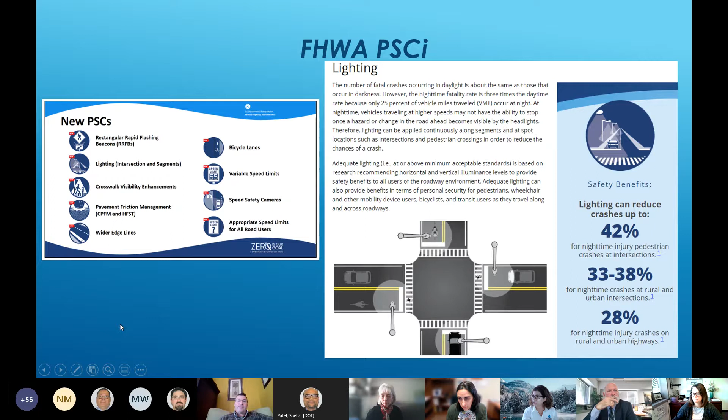New to be released in early '22, to assist practitioners with determining the most appropriate proven safety countermeasure for their location of interest, the webpage will now include a filter tool that allows users to obtain a tailored list of potential proven safety countermeasures. Users answer questions regarding area types, functional classification, traffic volumes, issues identified, targeted crash types, and other information to receive a list of the proven safety countermeasures meeting their criteria. The search function is intended to better serve practitioners, including those with limited safety background, when identifying and considering treatments and strategies that can improve safety as part of their program or project.

Both FHWA and NJDOT strongly encourage all agencies to consider widespread implementation of the proven safety countermeasures to accelerate the achievement of local, state, and national safety goals. Reaching our goal of zero deaths and serious injuries requires all of us to take ownership in safety. Together, we consider the safety needs at every stage of the project implementation process, the safety impact of every investment decision, and the appropriate safety countermeasures for every federal aid project.

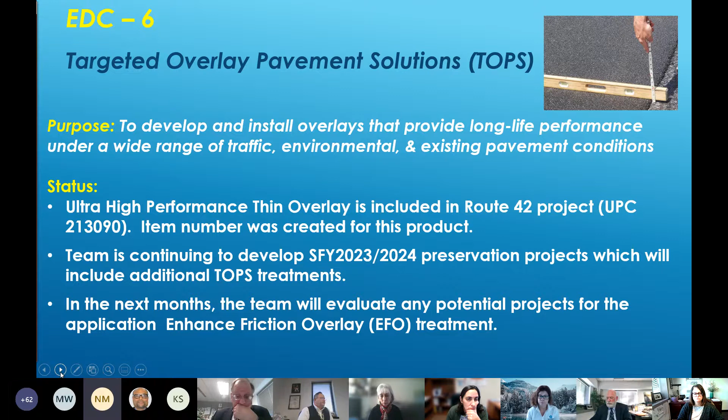Since last quarter, we have included ultra-high performance thin overlay in a project on Route 42. The team is continuing to develop fiscal year 23 and 24 preservation projects, which will include additional TOPS treatments. Next quarter, we're going to evaluate any potential project for the enhanced friction overlay, or EFO, treatment. Next slide, Amanda.

The last one is ultra high performance concrete, or UHPC, a fiber reinforced composite material with mechanical and durability properties that far exceed those of conventional concrete materials. Since the last quarterly, NJDOT has hosted the FHWA EDC6 UHPC workshop on October 20th and 21st, with 191 attendees including New Jersey contractors, designers, suppliers, and state and county engineers.

The workshop provided participants with a great understanding of what UHPC is and a suite of solutions that include using UHPC for bridge deck overlays, link slabs, and steel girder end repairs. It also gave participants information on where to obtain guidance necessary to implement different types of UHPC preservation and repair strategies, and allowed them to discuss their UHPC implementation strategy, construction specs, and design details with FHWA EDC6 UHPC team members.

In addition, NJDOT provided support to researchers at Rutgers for UHPC testing in the BEAST lab. Currently, we are identifying testing locations for performance testing on the UHPC overlay pilot projects. The highway occupancy permits were submitted last week in hopes of initiating the testing by the middle of December.

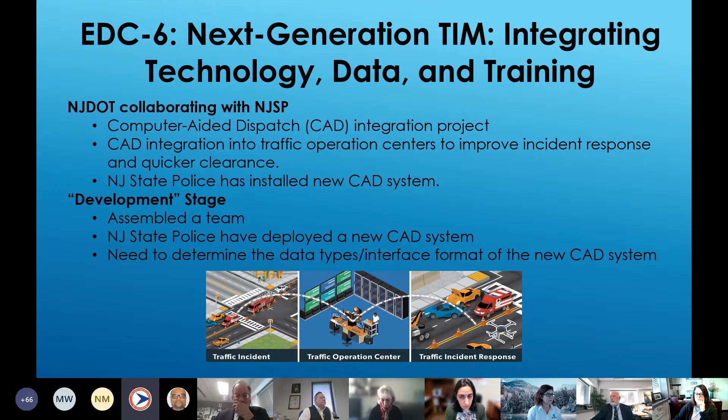I will provide an update for crowdsourcing for advancing operations. Here in the state, we are learning the different ways to use crowdsourced data. It provides a different way to monitor real-time traffic conditions, and it may also increase the geographic coverage area beyond fixed location roadway sensors.

NJDOT will collaborate with Waycare, an information service provider that collects crowdsourced data from weather data, mobile phone apps, and connected vehicles. The pilot project is currently at the development stage, and federal authorization of funds has been approved.

NJDOT is currently coordinating with the state OIT to make sure the new software application with the Waycare vendor is consistent and in compliance with the state OIT enterprise system, data architecture, and cybersecurity requirements. It's my understanding the NJDOT Mobility Operations Office will meet again with the state OIT this Friday to discuss some of the IT requirements. This concludes the status update for mobility and operations.

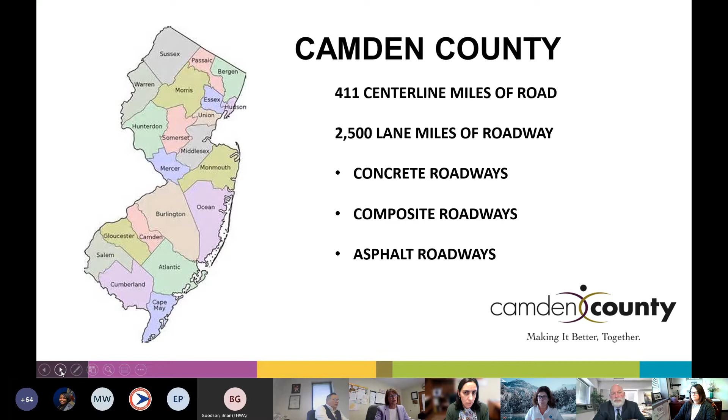Everything kind of came out from the top left-hand side of the map, which is where Camden City is. The growth went along the Delaware River towards Burlington County and then south along the Delaware. Those are our oldest cities, and then everything went down the White Horse Pike.

So those roads that were put in before 1950 are basically concrete. And what I like to tell people is my great-grandfather probably dredged the Delaware and created all that rock that is in these pieces of concrete that I'm working with.

After 1950, when we started driving cars and everything got widened, they left the concrete road in, and sometimes put in concrete curb and gutter, and sometimes asphalt. Then nobody liked the concrete, so I have quite a few asphalt overlay roads.

Down south, if you look at this map where it gets narrow, where you see the red line close to the bottom, those are our southernmost counties, and some of them are in the Pinelands. A lot of those roads are chip and seal with just 2 inches of asphalt on top, which is not doing very well at all.

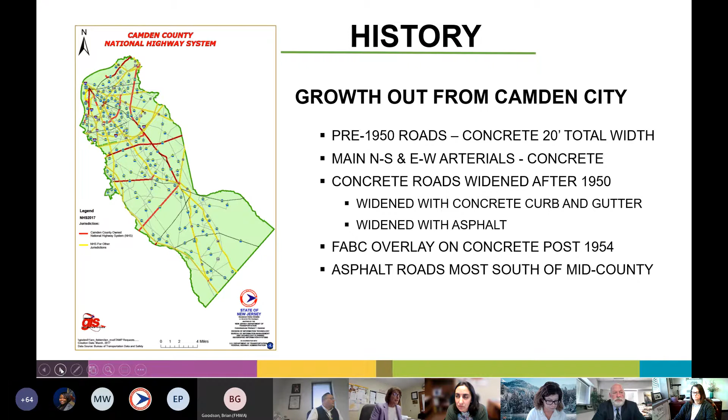So here's a typical concrete road in Camden County. If you look in the center of that picture, you see the manhole, and the older slabs are kind of lighter in color. They're 10 foot wide, and each slab is about 20 to 30 feet long.

Then the road was expanded, and in this part of Haddonfield, the expansion is concrete slab shoulders. I know this picture's a little fuzzy, but the curb is not in good shape.

What's really interesting is some of our concept developments that Collingswood has done—they have pictures from before 1950 when the sidewalks were 12 feet wide. So it used to be a walkable community, and when cars came in, they took those 12-foot sidewalks out and put in these shoulders.

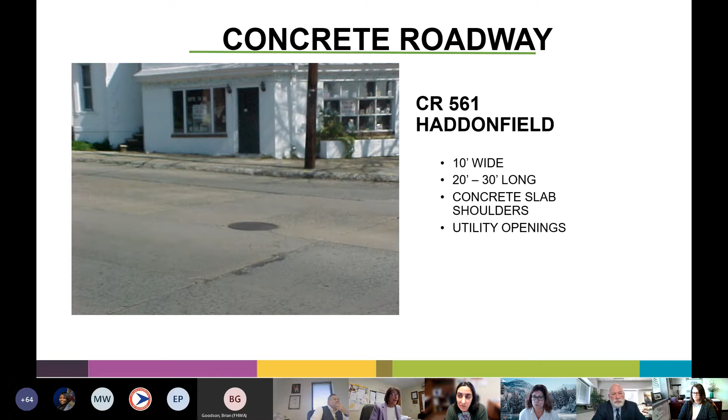So what are we doing with these concrete roadways? I just want to talk to you a little bit before I go into BRIC and SMA. In some places, we are just replacing with full concrete slab replacement.

It's very expensive. If you guys come off of 295, this is 561, which is called Haddonfield Berlin Road. At the 295 exit, we did full slab replacement. The rest of the road, we did joint repairs 4.5 feet wide with no diamond grinding. This is one of the alternatives that competes with our TOPS program.

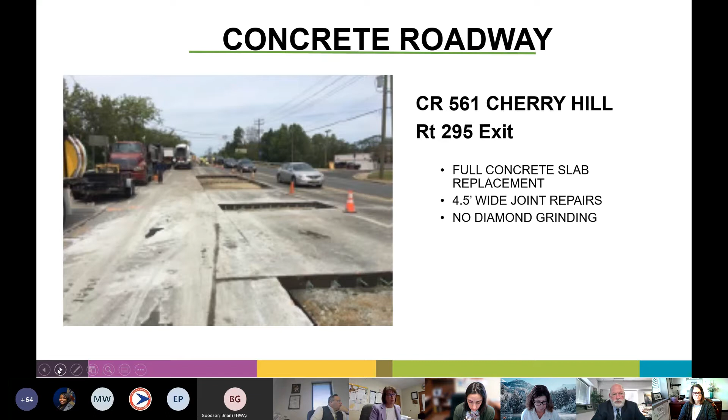So here's a typical composite roadway. As you can see, the regular asphalt that went down, probably it was I-4 a long time ago. We had the current asphalt. It fails at the transverse joint, it fails at the longitudinal joint, and even if it's sawed and sealed, it fails.

On this job in particular, what we did was cut 4.5 foot wide transverse joint repairs, taking out that terrible joint across the picture. Then we put back regular 9.5 M64 and sawed and sealed it. It doesn't hold up well—you've got failures adjacent to the saw and seal, and in the future those transverse joints will fail. I'm sure all of you here know that, because that's why you got rid of saw and seal.

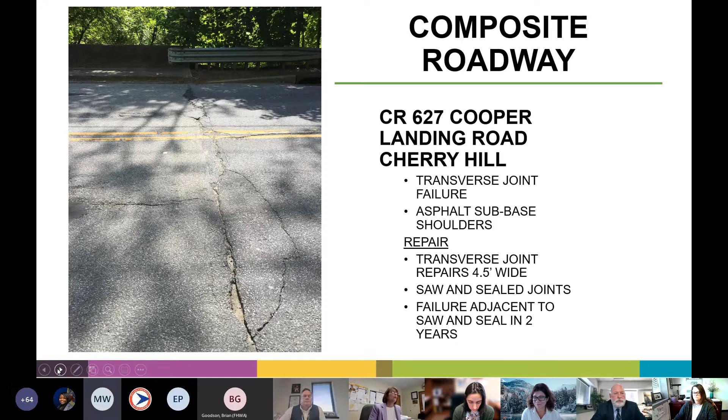So this is the first project I want to talk to you about, Westfield Avenue Phase 1. Westfield was bid in 2017 in Pennsauken, which is just to the northeast of Camden City. Again, most of the major roads are concrete. This was a half-a-mile project, and it cost $1.1 million for half a mile.

Why is that? Because the drainage in this roadway was completely failing. We were having flooding in front of business owners—the orthodontist building flooded, the real estate office flooded. Basically what we had was water utilities and sewer utilities going through the old storm pipes. This is something that happens when you're dealing with something that's 100 years old.

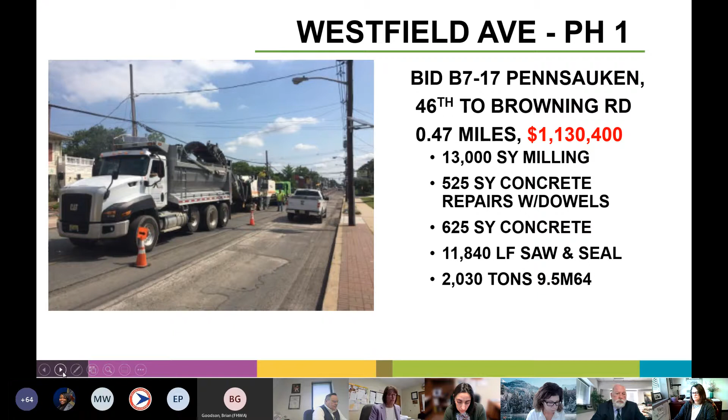So we're going along milling, and it's summertime. And what do I get? I get a call: we don't have asphalt under this road, we don't have concrete under this shoulder, we've got railroad ballast. Like, oh shit, okay, what am I going to do?

Now, the other thing I put on here is, in this job, I have really good curb. It's not crumbling and I have a lot of reveal. So that's a real positive, unlike that curb we saw in Haddonfield where it's just totally disintegrating. Next slide.

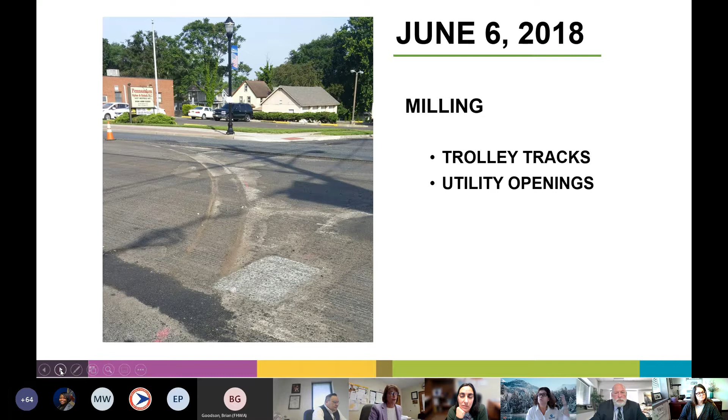The other thing we had on Westfield is old trolley tracks. That curve you see going across this picture — those are train trolley tracks, from when we used to have a trolley with an electric line that went up and down Westfield, in and out of the city of Camden. The metal was never removed. So this is where, luckily, I had a really good contractor who said, hey, even if you pave over this, it's going to fail. Next slide.

This is a week, two weeks later — we're putting down that binder-rich intermediate course. Again, I had a really good contractor. They were able to get the plant shut down. They had the equipment, and there we were. There's a picture of putting the overlay on top of here. So the public had no idea that we'd changed the scope. I also had a very good construction manager and inspector in the field, so we were able to do this in two weeks without delay, because this road has a lot of businesses and they'd all been notified of the detours and the work coming. Next slide.

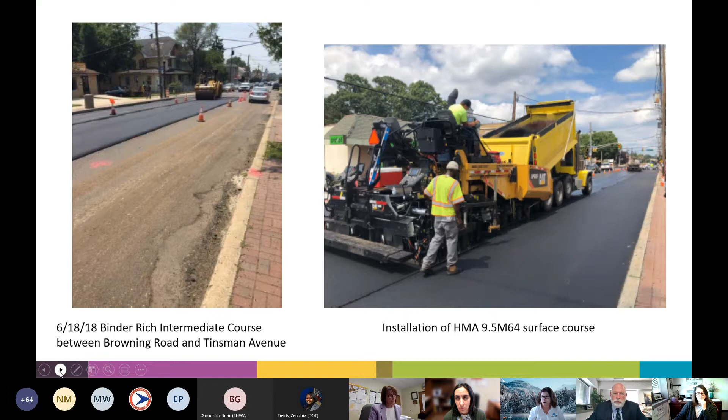So that was a success. The next project was Westfield Avenue Phase 2. Here, I basically had it designed with binder-rich intermediate course in mind. This was the job we designed and put in for NJIB funding. Some of you on this call probably came to that gold shovel opening, where we had tractor trailers going by us the whole time.

I see a question — oh yes, we definitely used an approved mix design. We tested it, not a problem.

So we have two sections in this 1.4 miles of Westfield Avenue. Basically, we have a downtown area closer to the first phase, and then a very industrial area where Pennsauken is close to Route 130, Route 90, and the Betsy Ross Bridge, heading into Philadelphia. So the design, even before we had NJIB money, was to do the binder-rich intermediate course in the commercial area and the stone matrix asphalt with overlay in the industrial area. You can see the prices there — basically $750,000 was just for that asphalt out of the $2 million.

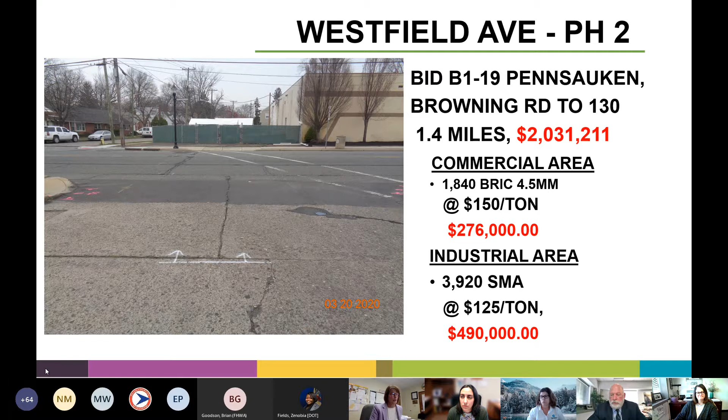To your point, when we wrote this spec, we basically used the DOT spec. The only thing I changed was to make it 4.5 mm for the BRIC, so it had greater flexibility. I think that was Robert who helped us make sure we had that for the 1 inch, so it had greater flexibility. I think even when we did that change order, we did the same thing — we called Robert Blake. Next slide.

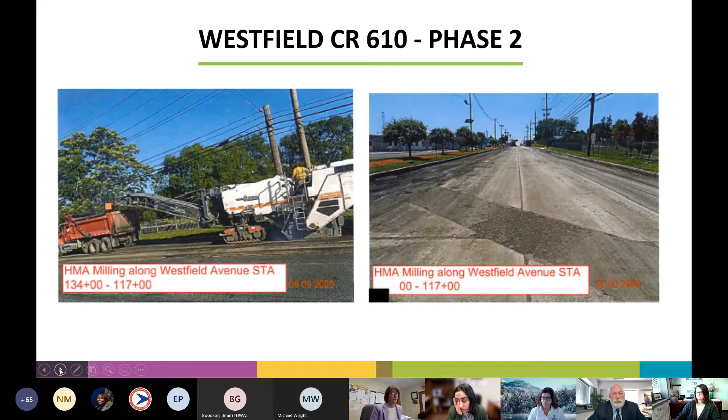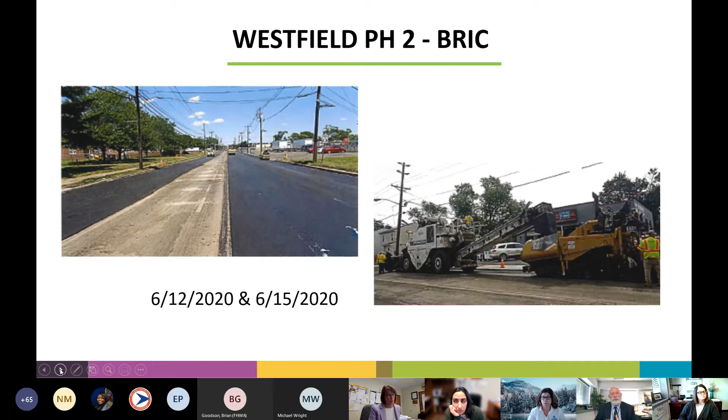So here we are putting down the BRIC. All my specs require a transfer machine, and the contractors I use have all gotten used to this. When we did the binder-rich intermediate course, this contractor was South State, so they have total knowledge of using this material since they work for DOT.

So the stone matrix asphalt, we had to do at night. You have so many trucks in this industrial area, there's no way you can stop business to pave, so it was all night work. And even after they did the stone matrix, we had to do some leveling courses just before we put the surface paving on.

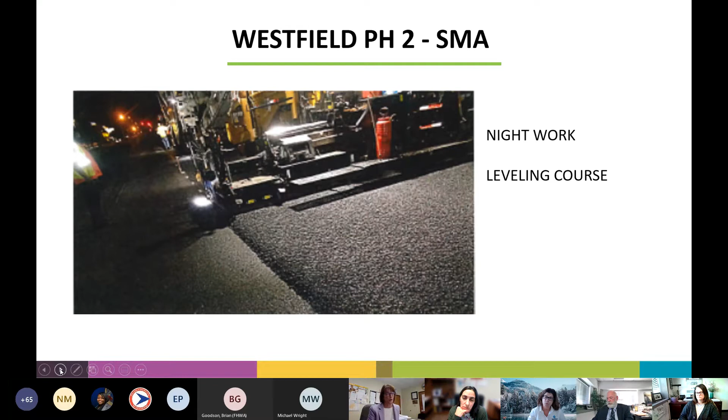So I think one of the things I've learned, why do I mandate a transfer machine? Because when we switched to 9.5 M64, around 2012, I was getting asphalt that was separating. The first road I did with the new material was Nicholson Road, and it was terrible. Even though everybody met the requirements of it not being in the truck too long, around the radii it separated, and it was a bear to try to get the contractor to come back and fix it.

Because I don't like infrared. I think infrared is a really bad way to make repairs, so I make them mill it and redo it. So I've found with my larger jobs, if I use a transfer machine, it gets remixed, and then I make sure my inspectors are sending trucks back if they sit too long.

As far as this set of plans for Westfield Avenue Phase 2, one of the things we really went over with our designer, Tane at the time - they're not working in South Jersey, I know they're working in North Jersey - was to have a good set of plans that really made it clear where the road shoulders changed and where you were putting down the binder rich and then the surface course. That good set of plans, and of course a good spec, a DOT spec, really is crucial to getting a good project.

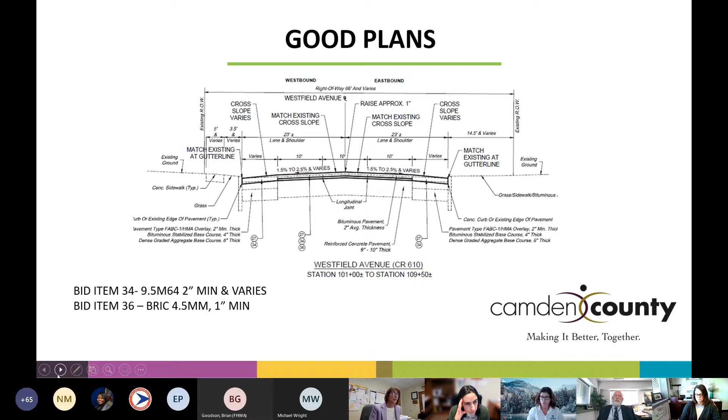So this again just goes - I use the NJDOT standard. As a county engineer, I really appreciate all the work that the material department does because I can rely on it; I don't have to learn it. The other thing that I think is really important is that all my submittals are reviewed by my designer, and I don't think you can do that at DOT. I think your designer, once a project gets authorized, has no more work on your project. So I can do it a little bit differently if it's not federally funded.

The other thing I do is I always have an inspector at the plant. If it's regular asphalt, I make my inspector check the RAP percentage. My inspectors in the field have to be trained - when I ask for proposals from consultants, they have to document that the inspector has been trained. Going back to get these pictures, I've got photographs from my inspectors of the temperature on the tack coat, the readings on the tack coat, the street sweeper cleaning the road. So all those things become almost as important as the piece of paper that you bid.

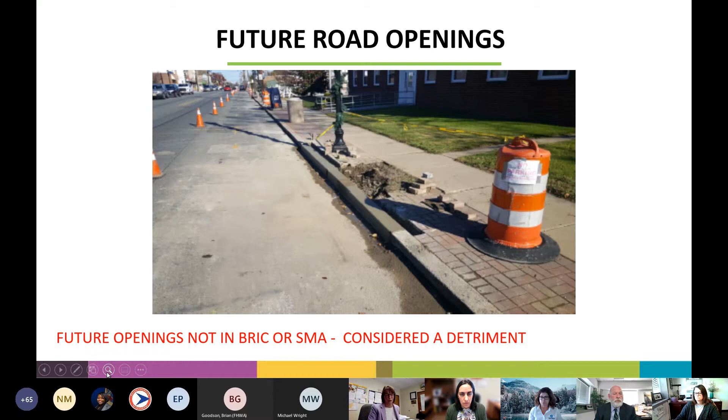So far we've been getting some pushback, but it's helpful. But in the future, if a water main breaks or you've got a gas leak, they're not going to have binder rich intermediate course or stone matrix - it's just going to be regular asphalt.

So this is what I see as the benefits, and maybe I'm preaching to the choir here, but I know that Amanda went and tried to find out the durability of binder rich. It's 15 plus years for a standard overlay. Sometimes it gets 10 years, sometimes less, especially when I'm doing composite roads.

The other benefit that I really see is the rideability. Because Westfield Avenue and anything else we do in the future with binder rich or stone matrix doesn't have to have that saw and seal. The public doesn't know what we're doing, they don't care what we're doing, but if they don't have that thump, thump, thump in front of their house, and then I don't get the call that my house is going to fall apart because of the road, I think that's a super benefit. I just think it's wonderful.

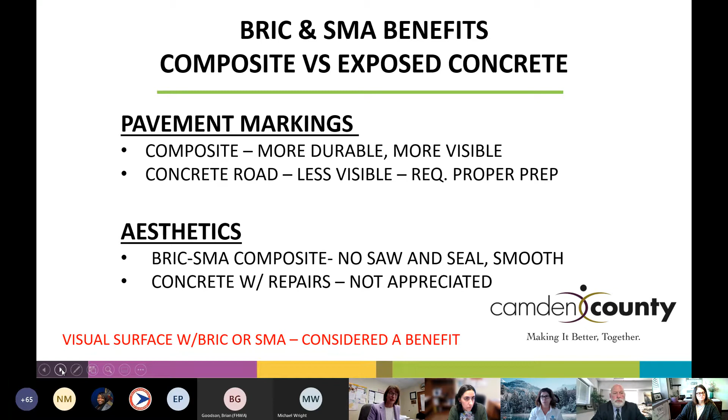The other thing that I have done, I didn't show you here, but comparing a composite road versus taking out a concrete road and putting in an asphalt road in Camden County is almost a no-brainer. We have concrete slabs that are 9 inches thick. If you have to take out a concrete slab and put in the standard county DOT spec, you're removing 5 inches of material, and that material has a high chance of being contaminated. Then you have to have a material handling plan, you have to have an LSRP, you have trucking costs, and God knows if it's really contaminated, you've got a lot of work ahead of you.

The other thing in Camden County anyway is we're in the alluvial plain. We have clay soils, fine silty soils, and a high water table. So if you take out a slab and put in an asphalt road, and you're anywhere near a low point in the road, that sub base you put in is going to pump. 6 inches of DGA is not going to do it. You're going to end up doing a change order and putting in 12 inches or 18 inches of DGA. And the other trick here is you don't even have to be in a low point. You could have perched water on top of a clay lens and it's not going away. That perched water is going to keep coming towards you.

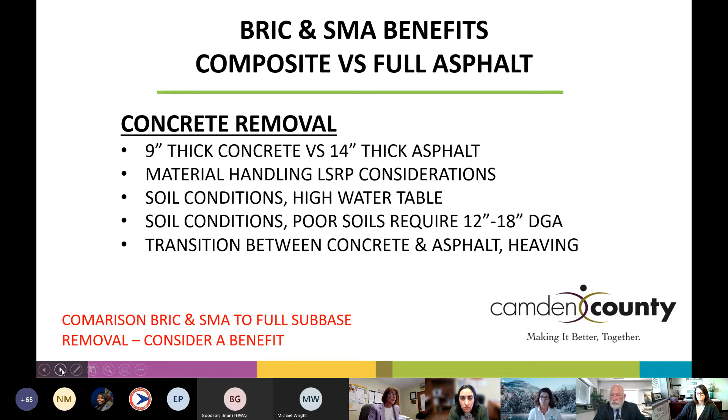I have been very lucky to have advocates on my side who are not engineers, who I explain this to, and then they explain it in non-engineering terms. You've got that 15 seconds of elevator speech, and if you go beyond 15 seconds, that's it, you're done. They don't want to know. But if you can tell them, hey, you're going to spend $500,000 more, but the road's going to last longer and you're not going to have failure, that's almost all you need to say.

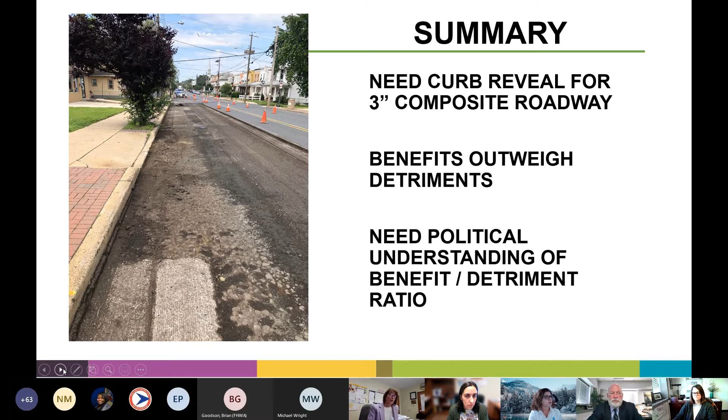So my next slide is just showing you what I hope to do in the near future. This is Kings Highway, and again, if something's called Kings Highway, that means it was started when there was a king in the United States, so it's pretty old. So what you see here is concrete slabs in the middle and an asphalt shoulder on one side, concrete slab on the other. Somewhere along the line, the center line of this road changed. This, we hope, will be our next stone matrix or binder rich intermediate course, and we're hoping to fund this using NJIB funds.

Next slide. I know we answered some questions, but I'd be glad to take any.

Kevin, there was one more from Bob Signora. Can you institute a utility opening moratorium by any chance, 5 years or 7 years, where they can't cut into your roadway? We had a 5-year moratorium and we changed it to a 7-year moratorium. So we are enforcing the 7-year moratorium. Now, that doesn't mean you can't open the road. What that means is you can open the road, but you must pave curb to curb and 100 feet in either direction from your opening.

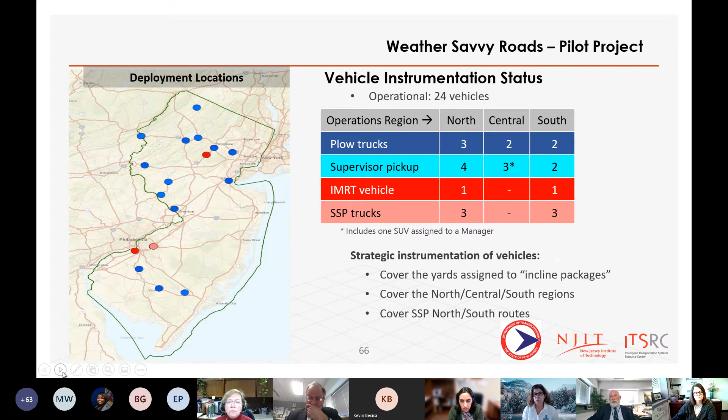You can see that we have a mix of plow trucks, supervisor pickups, IMRT vehicle. IMRT lingo is Incident Management Response Team. SSP is Safety Service Patrol, and they have them in different areas. As you can see from the map, the colors show we have them in a number of places. Some of the vehicles were selected because of the incline packages, and incline is really referring to Route 78 in Jugtown Mountain, Route 280, where there's a steep incline. So that's where these are.

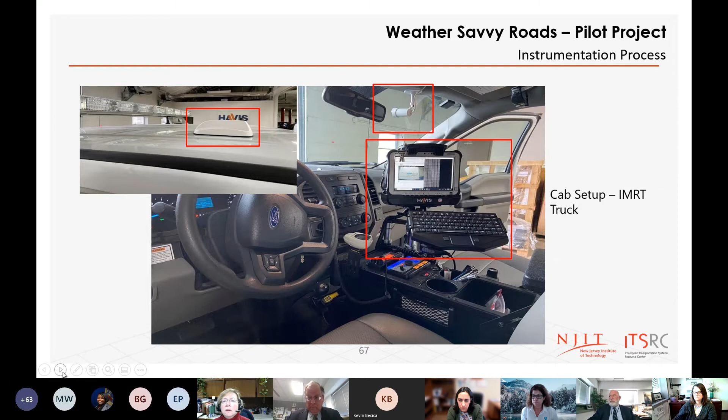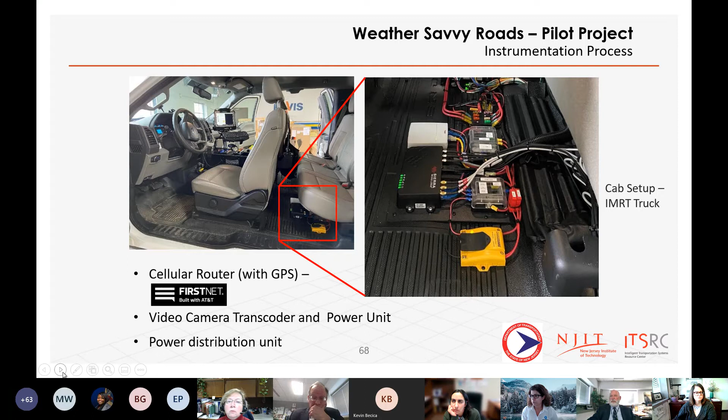This is basically the same vehicle, but now you can see where we've put the other equipment, the cellular router, and all the other wiring that goes along with it. This happens to be an area we're looking at to try and figure out how to lessen the footprint, because as you can see on the picture on the left, it's currently sitting under the back row. Although that's not too bad for an SSP vehicle or an IMRT vehicle, the folks using the vehicle get in and out a lot, in bad weather and whatnot. So we're trying to look at ways to reduce the footprint so we can better protect it with respect to dirt, dust, liquids, things like that.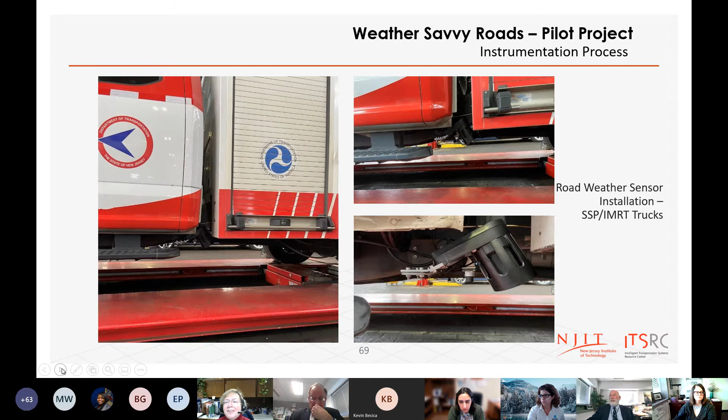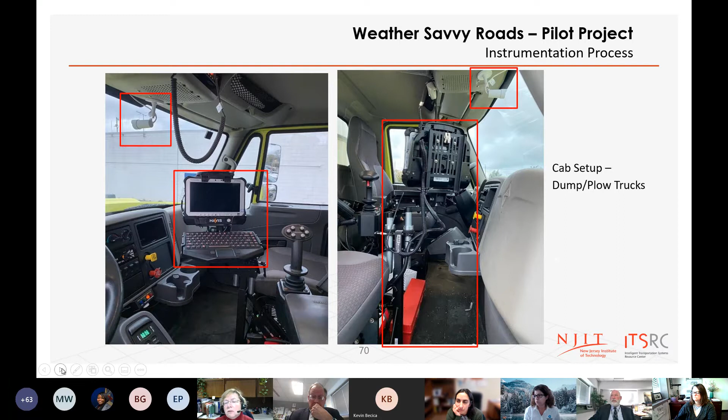This is inside the plow truck, basically the same setup as what you saw on the IMRT pickup truck. The plow is basically the same thing, you've got the camera, the tablet, just two different views in the cab. We've found that the different manufacturers make plow trucks make it a little more interesting to do some of the installs in there, so that was something we had fun with as we went on.

This is the plow truck on the outside. The left photo has the red box around the MRWIS sensor that you saw underneath the SSP vehicle. This is in the front of the plow truck due to the way the configuration of the vehicle is.

This is a better spot for us to squeeze it in. The picture on the right is the ambient sensor we installed. When that comes from the manufacturer, it comes as one unit, and we separate it: the white stick goes away from the other part, because we want the MRWIS part closer to the road, and the ambient temperature stick a little higher and away from other things. We place this on most vehicles behind the cab itself to give it a little protection, but keep it nearby.

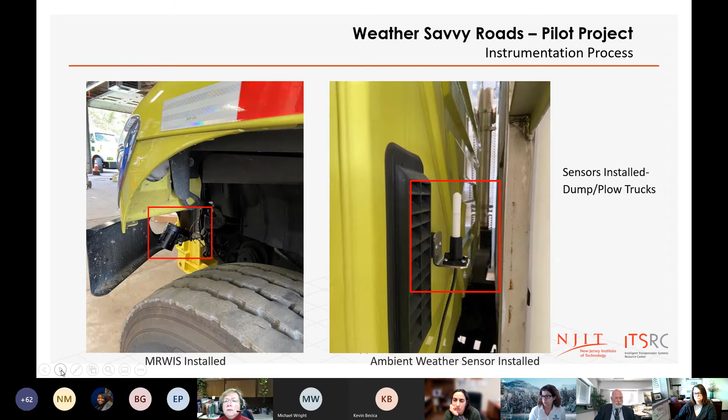Okay, this is our web interface. The 139 users may not be an accurate number, it may be a bit higher now—I've asked for logins for a couple more people. The upper left is the actual entry page into the website. We have a defined group of users, and they set up their own passwords. The bottom left is where you can change settings a little, like your password and things along that line.

The bottom right is a map, and on the left side of that it shows the different vehicles out there and which ones are operational. Green is engaged and moving with the engine on, and red is stopped—just like you'd expect with a traffic light. We try to make a lot of this intuitive from your general knowledge, not something where you have to learn a whole new language or code.

In the center of that bottom right photo, you have a map showing where the vehicle has been. I refer to it as chicken tracks—you see where the vehicle has been, and it's color coded by the temperature of the road and everything. On the right side, you see the image the driver sees, and above it, information from the weather sensors: air temperature, road temp, humidity, dew point, all that stuff. Below the image, you see other information such as water, ice, snow. There will be dials all the way across if we're in a major storm, showing water, snow and ice, all those wonderful things—shown at the bottom there.

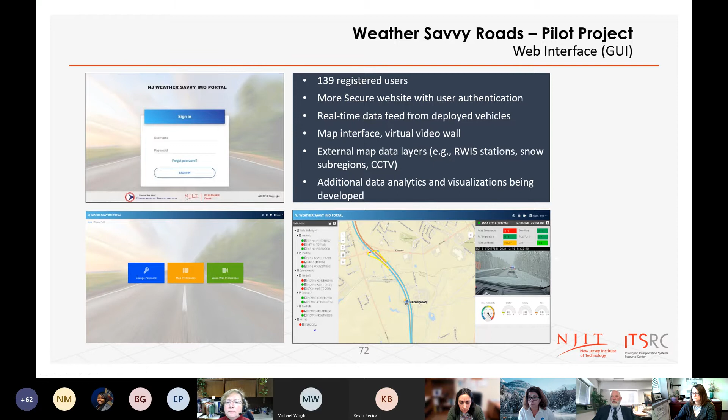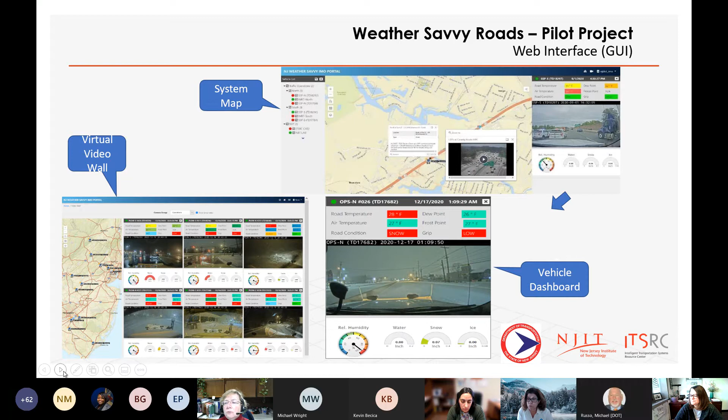This is more of the same, just a little bigger. The video wall was added partway through last year, because people wanted to see more than one vehicle at a time—they wanted to see what neighboring crews had. So that's what we did with that. On this image you have six vehicles, and they all show what the driver sees. The center image, labeled vehicle dashboard, is just blown up separately from the image above. It basically shows what the driver sees, and it really gives a different perspective for snows and finding out information.

Again, this is basically the same image from the bottom left on the previous slide, just a little bigger so you can see and get a better feel for everything. This is all the same storm—one of our early storms last year—and we were quite happy with how Weather Savvy performed during that storm. Just really nice.

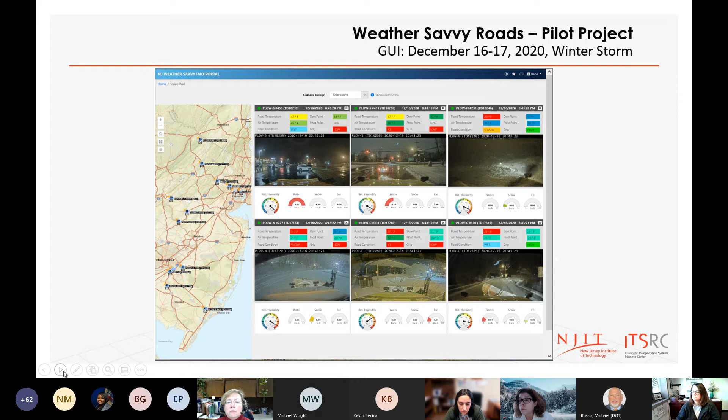This is our Firstnet information here. It's about how good our signal strength is, and when you look at it, it's not too bad. This was from December of last year through February of this year, and it came out with a really good number for us: 98% excellent or good signal strength. That was a nice thing to see. The map in the middle shows a couple of points where we have a bit of an issue, but it's good to know where your positives are and where you need to watch out for some things.

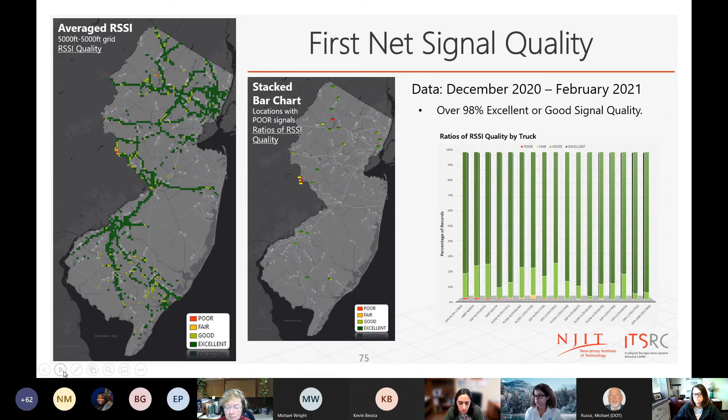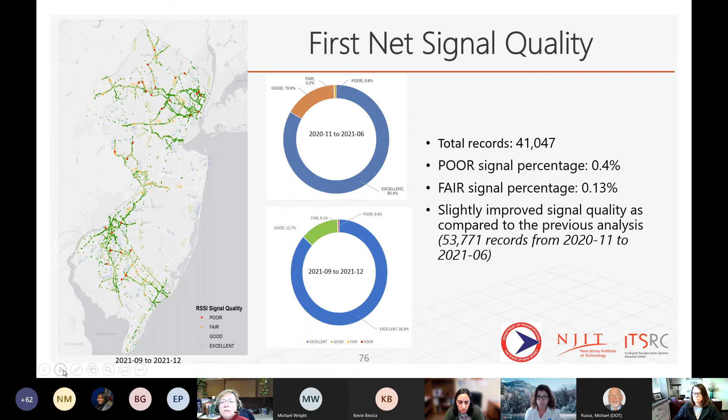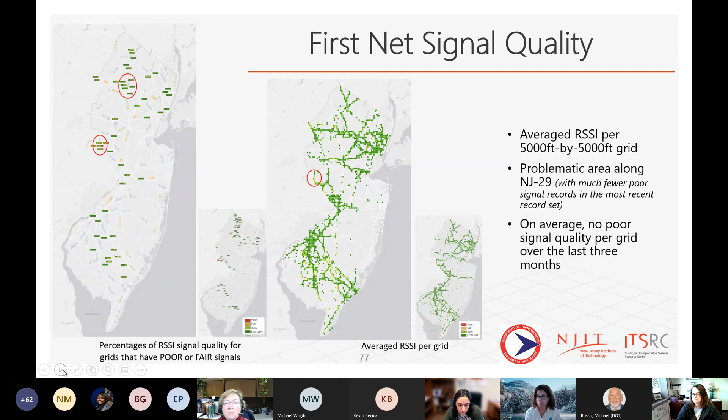So next. I'm killing everybody with these slides, I know, sorry. These are fun for us, but this does show you the two spots that we have some issues with. One is along Route 29 up in Hunterdon County. A little bit might be geographics and everything.

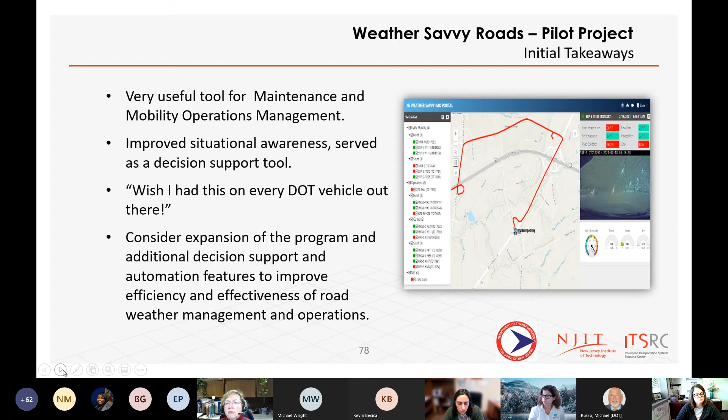So one of the things we considered, partway through, was what are we going to do for more? What can we do to improve this? So we've done some things in the course of the year, small additions, small changes. Go to the next slide.

Some of the stuff we have learned and modified as we went along - one thing I hadn't mentioned before, but you can read at the bottom, is NJIT has been helping us with this. NJIT is the ITS Resource Center, and through their work and looking at the data coming back to us, they discovered something that was an issue. The data didn't make sense - it just wasn't right.

So they ended up having conversations with the vendor, the Vaisala vendor, and said, this is interesting, can you swap them out and give us those sensors back? So we swapped them out and gave them the sensors, and that's where they found an issue with their manufacturing that didn't show up anywhere else. But because of the data we had going back, and NJIT was actually examining the data, as opposed to a lot of other places - some states and other countries were using it and accepting the data coming back - they ended up benefiting from our thoroughness here.

The next thing was the tablet. We had installed tablets in all of our original vehicles, and while I was in a garage waiting for a sensor to be installed on another vehicle, I got a phone call saying there was a tablet stolen from one of our trucks. I was like, what? How did this happen? Because they are locked in, but whoever took it broke the frame of the mounting unit to get to the tablet.

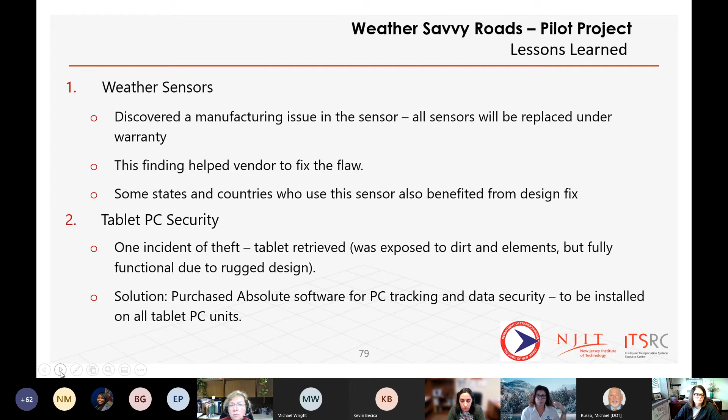As a result, we've now put tracking onto the tablets we're installing, to allow us to wipe the unit clean if we need to at a later date. This isn't going through the Garden State Network, it's going through NJIT, but we still didn't want - some people may be using it for their work activities - we didn't want any of that information compromised in any way. So we have that ability now. So if you go next.

Dashboard cameras. The dashboard camera is the one in the upper left, and sometimes we ended up seeing the image on the right. While that's a very nice picture of the dashboard inside the vehicle, it didn't quite have the same effect as showing what the road conditions were. And if you put the plow on the end of that truck, you really would just see the backside of the plow.

So we've done a couple of things with this. One is we've looked at putting something into the tablet that will allow the driver to click on and see what the image really is, because those bullet type cameras can get knocked around, can get accidentally hit, or some people like to adjust it themselves, and this way they can see where it should be when they're all said and done. Another thing is a different type of camera, which you'll see on the next page.

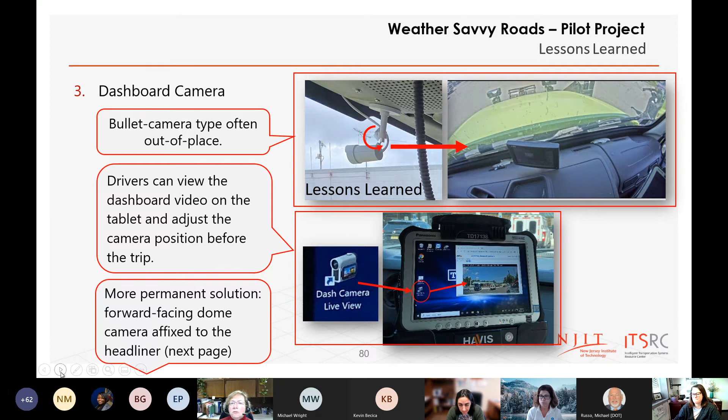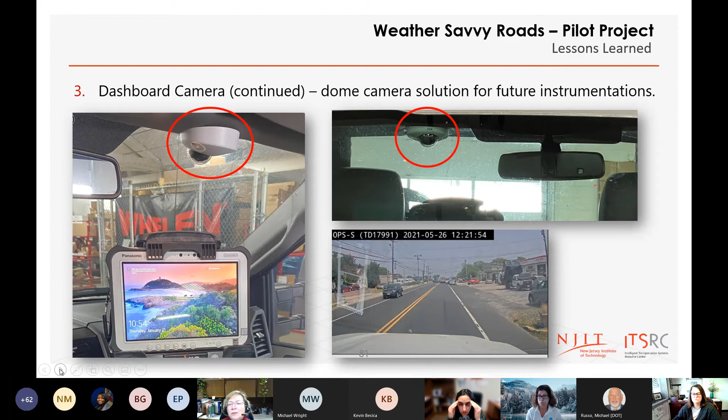This is a dome camera, and the dome camera is one that doesn't get hit. Once it's fixed, it's fixed. So that should make it easy — you don't have to worry about people bumping into it, somebody knocking it with papers going in front of them, or just moving it. This is something we're putting in and testing out this year. One of the interesting things is that this dome camera actually gives a better quality image for less money. So it's kind of an interesting little thing, but we're still looking at it for other aspects of it.

Okay, and these are some of the things that we were looking at. The cost per vehicle is about 15 grand. That is basically soup to nuts.

One of the things we've had issues with is not just the EAI vendor, but the FirstNet vendor. Our two vendors — that coordination is a challenge. We're dealing with different vehicles from different areas of the state, finding a spot to use the garages for the installation of the weather sensor. But EAI is a vendor where we have to take the vehicle down a day before, drop it off, go back two days later to pick it up, because they need a whole day for installation.

For some reason, they prioritize state police over us. I just don't get this. But the state police are also doing the same type of thing — they have their own similar equipment in their vehicles, and they end up with priority. So we've had some scheduling challenges in the past that we've tried to manage, so we get a couple days in a row, so that if say North has to drop a truck off and they have two trucks, they can drop one off, and as they're picking one up, they can drop the other one off. It's a lot of logistics going on with a lot of different people and a lot of different priorities.

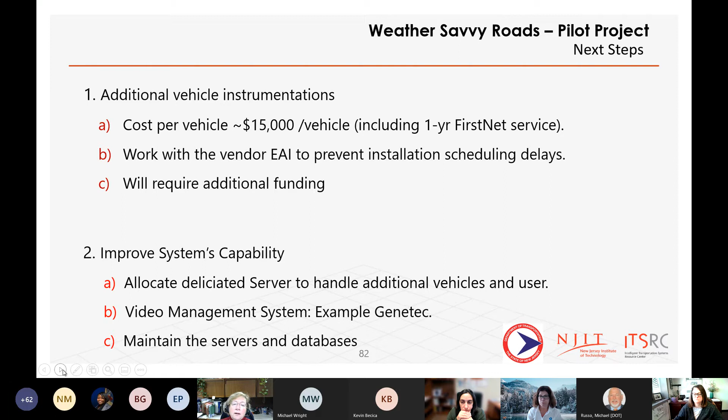It's sitting, as you'd think, underneath the vehicle or in front of the plow, under the front bumper. It's going to get a lot of snow, a lot of dirt, a lot of calcium, a lot of stuff. After a snowstorm, what do people do? They run to the car wash and get their car washed.

And that's what this needs. It needs to get a garden hose basically up underneath to clear the lens, because it's optics being sent out to the road and back, and it needs to be cleaned. So we've said, look, if you need to take it through a car wash or a truck wash, fine, go right ahead, do that. But don't get your undercarriage that special treatment. Don't do that, because that's going to leave a film on your lens. That's going to be a problem.

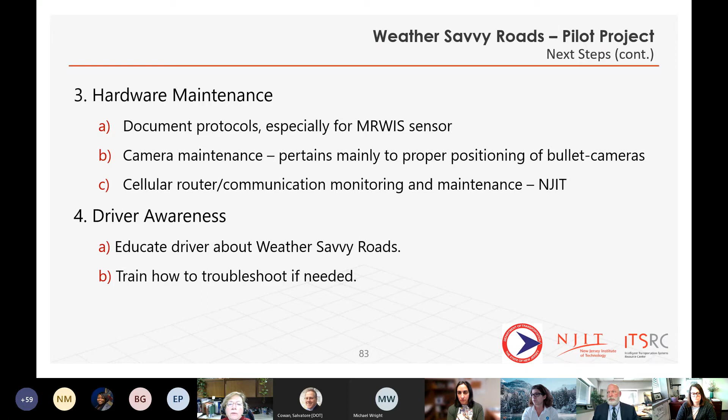These are some things that we have talked about internally. Some of them we're trying to move forward on, and some of them we're just not quite ready for. But one example is, if you had a plow train going forward, you'd have signal priority for the plow train, so the plow wouldn't have to stop, leave that line of snow or salt on the road, and then move forward, because you can tell when the trucks stop that all the stuff is there. So that's one of the things we're looking at. We're also looking at getting some information about the spreader, just to analyze work effort and everything. So these are some of the things that we're looking at in the future.

Okay. All right. So that's it for you, Sue?

That's it, except I must have missed it when I was looking, but there was supposed to have been a slide saying that one of the things that topped off this conversation again was that in the annual meeting for ITS New Jersey, Weather Savvy won the award for the statewide regional agency for outstanding ITS project of the year. And we had a number of partners on it. Our partners included EAI, who did the inside-the-cab work. We had Vaisala, who was our sensor provider, NJIT for all the work they did with us on evaluation and helping us, as well as our federal partners. AIC, Helene, and Sutapa all have been helpful in moving this forward and hearing what we're doing. So we thank them also. So thank you, and now I'm done.

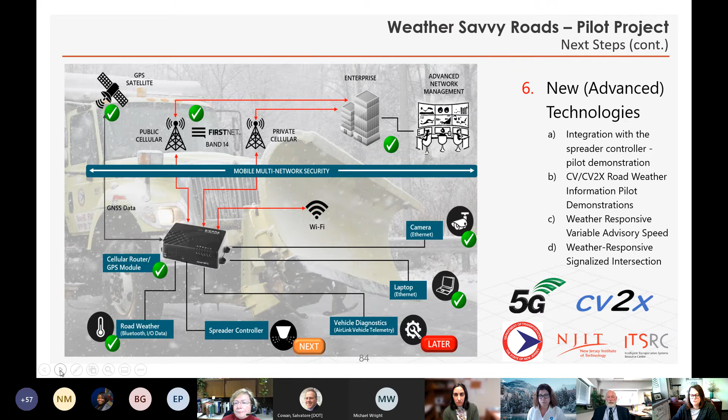So now I'd like to share with you an exciting announcement about our 2021 Build a Better Mousetrap competition. We had 2 winners this year, 1 local winner and 1 agency winner, and we presented the awards in October during our NJDOT annual research showcase. And subsequently we produced a nice video that not only announces that the 2022 competition is now open, with a new due date of May instead of August.

But the video features details and interviews of the winners that we had this year. And I just want to mention that our subcontractor, CivicEye, does a really nice job for us, and this is just one more example of their quality work. So please keep the Bureau of Research in mind if you have anything innovative that you'd like us to feature, and I'm not just talking about NJDOT, I'm talking about any of the locals. As you will see in a couple minutes, we had a local winner. So if there's anything you'd like us to feature, please let us know. We have the funding, the contract mechanism, and the expertise, so please keep us in mind.

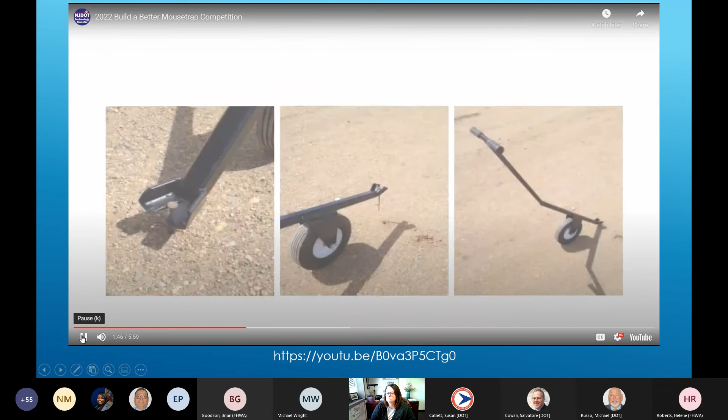Your idea might improve maintenance tools, equipment fabrication, or ways of performing maintenance. Your idea might improve the use of transportation facilities, such as improved storage or services, how you do inspections or data collection, or manage your assets to make or prioritize decisions. Some examples of award winners from the national competition in recent years have been a guardrail reclaimer, a survey pin puller, and asphalt patch trailer improvements.

The Better Mousetrap competition is all about recognizing and rewarding innovations, great and small. It all begins with your creative ideas. But remember, submissions in this competition must reflect examples of implemented products, procedures, or processes, and award winners must have advanced their ideas to implementation.

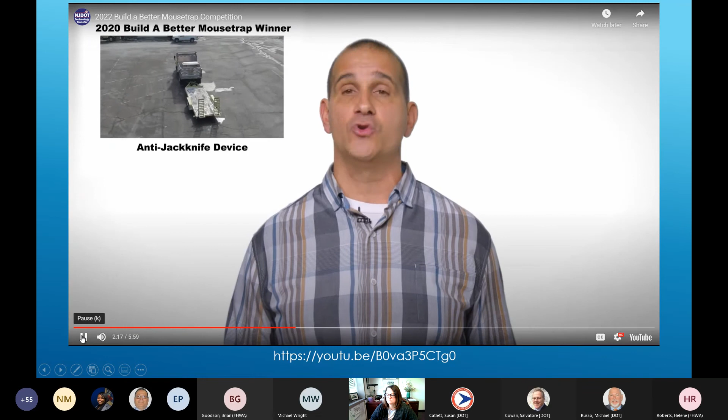My name is Art Villano, I'm the Superintendent of Public Works from Montgomery Township. The project that we came up with was an inlet repair trailer. We were looking at a way to streamline and be more efficient on our inlet repairs. We had an older trailer that was sitting, not doing too much, so we rehabbed it.

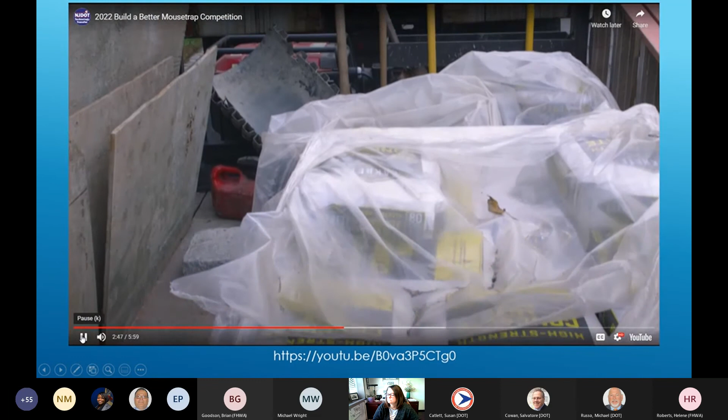We installed a generator and a cement mixer, and are able to keep pallets of concrete and lumber and all the tools we need for the day. We used to go out with two or three trucks, do some work, then come back and get a different unit, whether we needed a backhoe to lift up the grates. Now we have a crane mounted on the trailer.

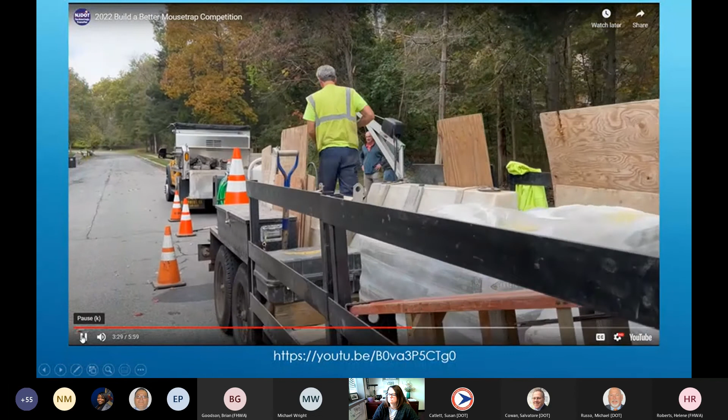It's kind of a one-stop shop. Once they're out there, they're out there. There's no need to run back and forth. They're never short anything because everything's been preloaded on the trailer for months. The trailer is set up and ready to go. If we're switching to a different crew, the next crew taking that unit has everything on it. They don't have to think about what they need. It's all right there, so there's no wasted time coming back for material, tools, or supplies.

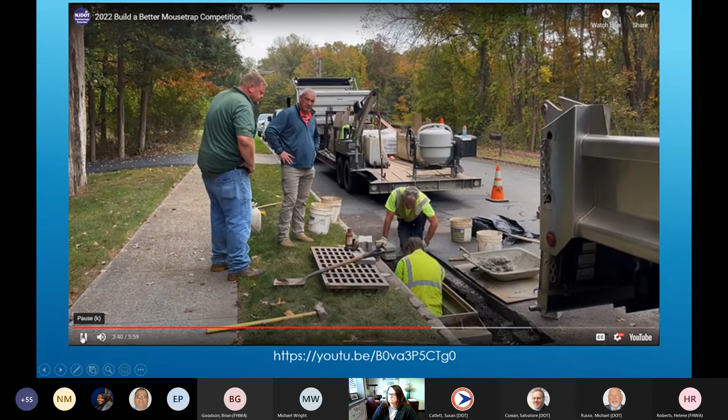There's a benefit of safety because you're not working out of trucks where you're lifting stuff above your waist or above your shoulders. You're always on the trailer deck or on the shoulder. So there's no need to be in the road, so there's no chance of anybody getting hurt.

My name is Mark Franco. I'm a technical specialist with New Jersey Transit, bus material and technical support, and I invented the tire center line bracket.

When the president of the snow chain company came down to show us how to install these units, he was using a plumb line on the inside of the wheel. We were all getting different measurements, and it wasn't very consistent.

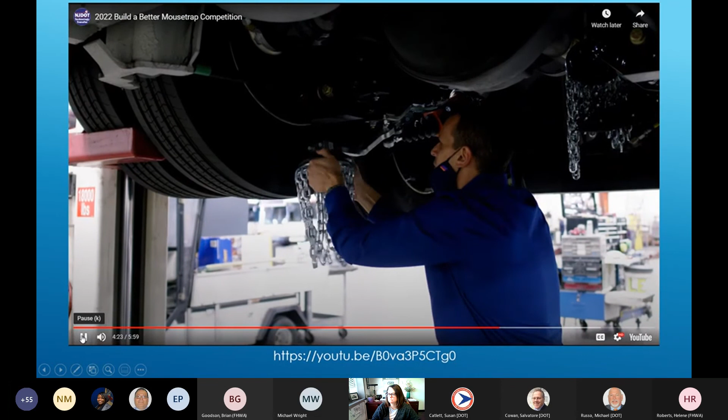So I thought to myself, what are we trying to find? We're trying to find 6 o'clock on the wheel, because that is the proper spot for the unit to contact the inside of the tire. So I invented this bracket in order to find 6 o'clock on the inside of the wheel, which in turn will allow us to mark 6 o'clock on the inside of the tire.

The bracket is basically a mild piece of steel bent at opposing 90-degree angles. You just set it on the inside of the wheel with the digital level attached, and when you get to 0, you've found 6 o'clock on that tire.

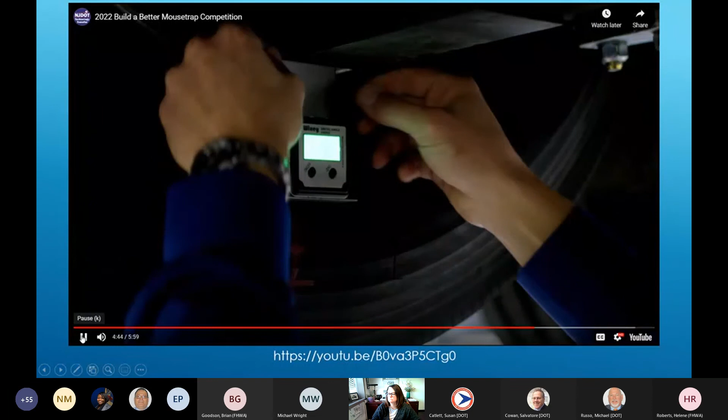The way this increases efficiency is it keeps all our measurements consistent amongst all of our garages from North to South Jersey. Everybody will be taking the same measurements and able to get these units working properly and safely. It takes less time to find the right measurements. And as we all know, time is money. So our mechanics aren't taking extra time trying to find the right measurements.

When I found out I won this award, it was honestly disbelief at first. After reading the email 3 times, I was extremely happy and honored to be able to bring NJDOT our first Build a Better Mousetrap Award.